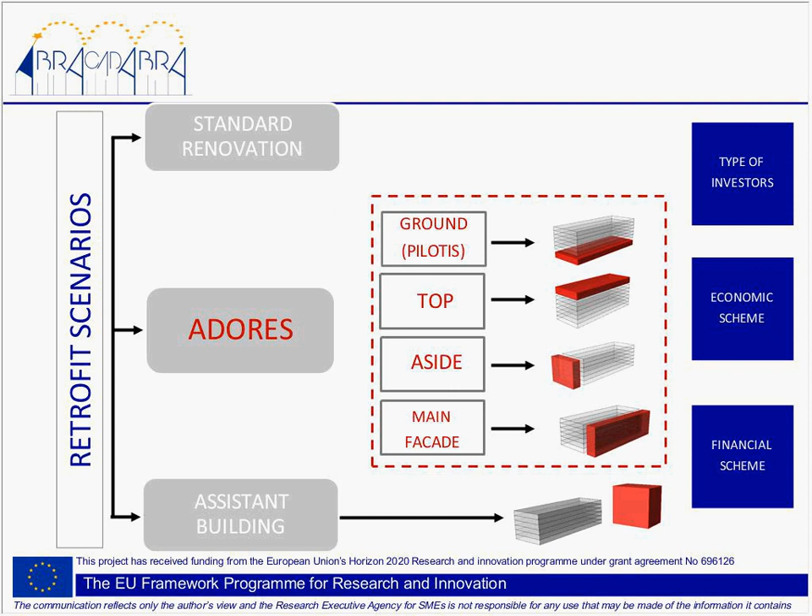The type of target groups and stakeholders that we involve in our project, as Professor Ferrari mentioned, the aim of the project is to have great participation from all the stakeholders, to create, let's say from a market and legislative perspective, a push forward for what is technically already possible.

We want to get condominiums and private properties involved, and for this we are organizing national meetings and international workshops, which can follow the results through minutes and all the reporting on our website.

Technical and construction companies as the technical parties in charge of the realization of the buildings, and also public and territorial bodies that define the current regulatory environment, both from energy plans and urban plans. So we are trying to set up tables to discuss the possibility of including the Abracadabra strategy directly in the available instruments.

Because we've seen that financial subsidies so far, for the past five years, have supported the initiatives only partly. The result is this 1.4% renovation rate per year, and it's not enough to create the revolution and transformation of the existing building stock to the extent that Europe needs.

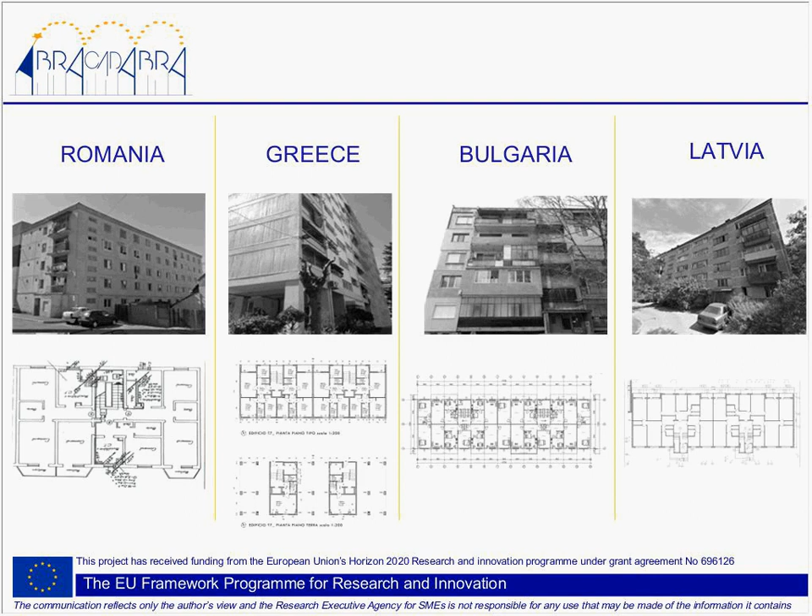I'd like to show you a case study. These are the case studies we now have on board: Romania, Greece, Bulgaria, Latvia, Spain, Norway, Netherlands, and again Italy, several case studies. We will have to enlarge the case study group by another 40 new case studies.

So if your institution, or someone you know, is aware of construction building works that might be interested in testing out the feasibility of the Abracadabra strategy, please contact us. We would be happy to see if your building is feasible to become one of our case studies.

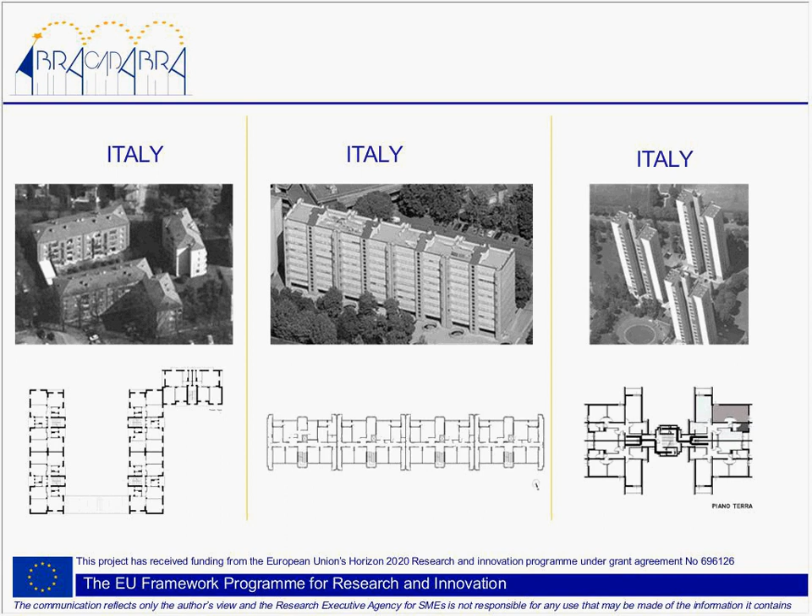That is for now, and you can see we will test the feasibility on a total of almost 2,000 dwelling units for about 200,000 square meters, and the aim is to generate a reduction of over 21 million kilowatt-hours per year. So there is a benefit not only in real estate terms and empowering the possible renovation of existing building stock, but also of course in reducing the energy consumption of the existing building stock.

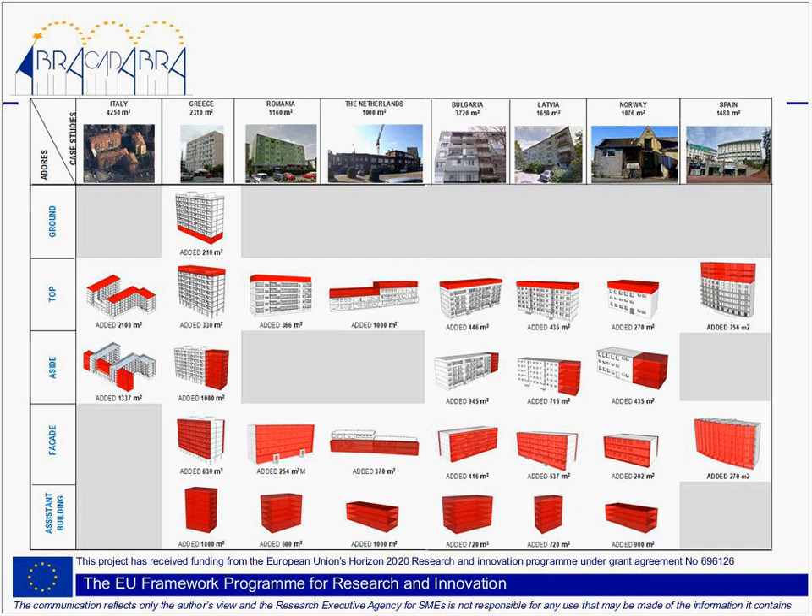Here we can see the different scenarios I mentioned at the beginning: ground, top, side, facade, and assistant building, and which ones are feasible for each of the Abracadabra case studies. Of course, gray boxes are the ones where it's not possible. We do not infer that all the scenarios are possible in all our case studies, but we wanted to analyze in which cases, conditions, and circumstances one or another scenario would be feasible, and which ones are most favorable or viable for stakeholders.

In detail, this is the Italian case study of Corticella. It's a big neighborhood that works a bit like a microcosmos, so it's all connected. It also has a district heating system. So I classified the buildings according to type, G1.1, G1.2, 1.3, and so on.

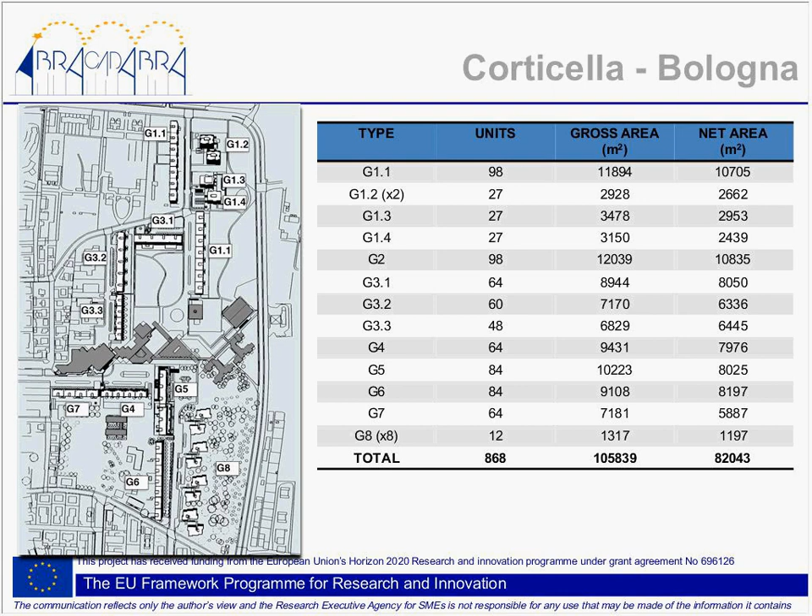Each building typology has a code. We then, for each of these, calculated the possible cost of a standard deep renovation for each scenario, and the cost of eventually carrying out the AdoRes strategy on top, aside, facade, or assistant building. Here now it's the type G2 building typology, a line building, a block, and we have the cost per euro per square meter for each scenario and for standard deep renovation. Consider

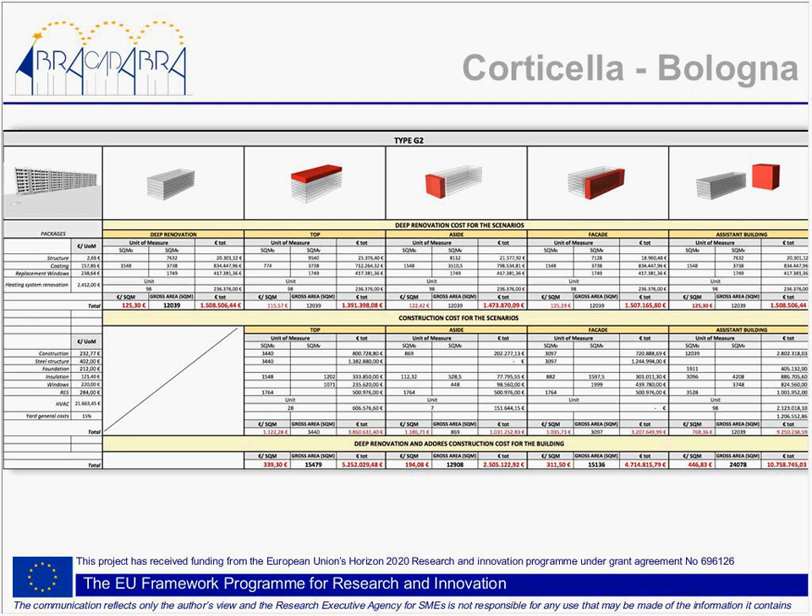the possible architectural outcome. So I wanted to investigate how much add-ons could be built, of course resell, the different amount of square meters and livable surface that could be created, sold, and bring back revenue that could partly or sometimes totally repay the cost of investment needed for renovating the existing building. So the first building is the G2, I mentioned the line. The second is a tower, totally different typology, different possibilities, different amount of square meters, and sometimes one scenario is favorable for one typology and not favorable for another. The third is still a line, but slightly different.

And these are other building typologies, as you can see. They also differ in construction type and, of course, dwelling sizes and typology. So sometimes the facade creates extra space, the enlargement of one room, or can close the existing balcony, or allow the transformation from a balcony to a serra, and so on. What I want to point out is that there is an increase in square meters in the real estate surface, but sometimes some scenarios generate an increase in the quality of the building.

So we're not only talking about energy benefits or real estate and money benefits, resulting in a reduction of the payback, but there are also quality benefits that sometimes cannot be accounted and calculated in terms of money, but do something for the overall renovation of the existing building.

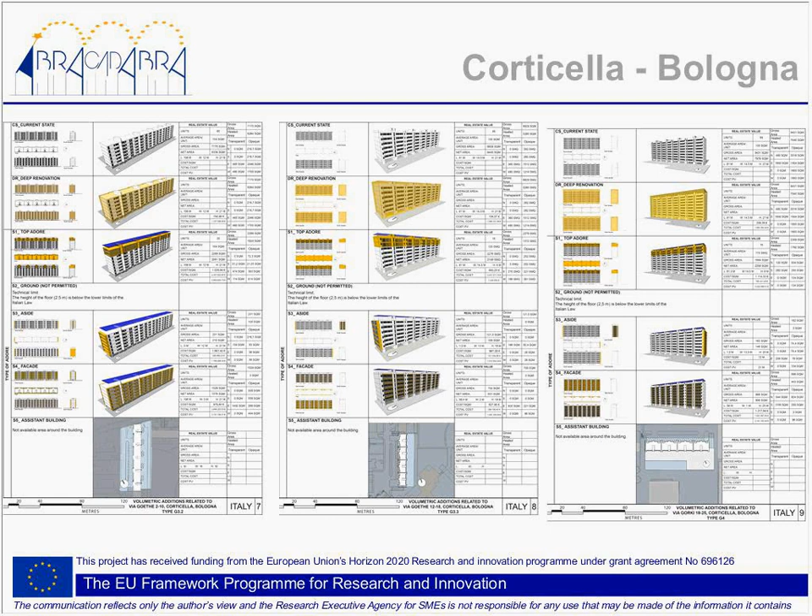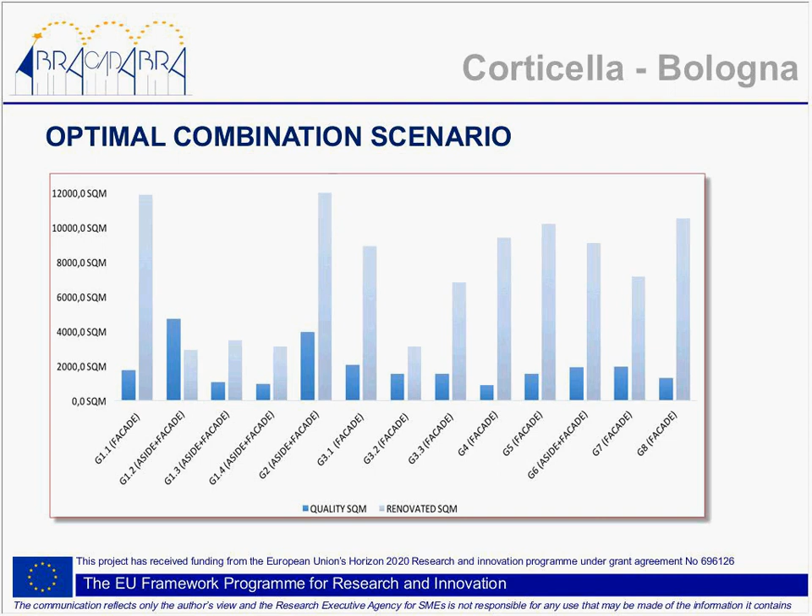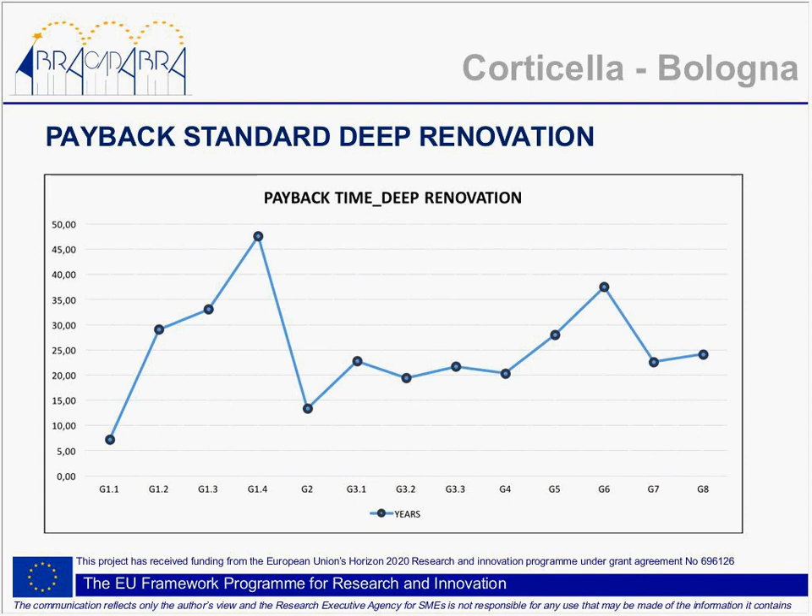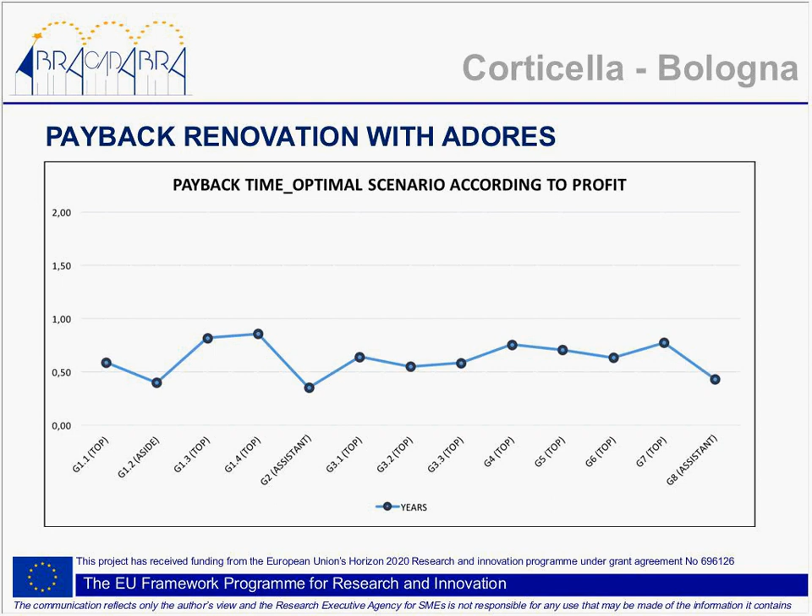When we combine the standard deep renovation with the AdoRes, we have a totally different result, because the framework shows less than 1 year payback time. So the G1.4, for example, with a simple on-top renovation has a payback time of less than 1 year, because creating this additional surface generates revenue that pays back the renovation that otherwise would never be paid back by only the energetic reduction, and even a lower payback created by the possibility of combining the scenarios that we showed.

So G1.4, for example, has top, aside, and facade options. One would like to ask then, why would I spend more, have a higher payback time, for example 1.5 years, when by just doing an on-top I have 1 year? Exactly what we were talking about: there's not only the money and the economic aspect, there's also the quality.

By increasing the facade, for example, and offering the existing inhabitants the ability to improve their houses, we create consensus and gain the approval of the existing building, which, as many who work in this know, is the main barrier to getting the green light from the existing building and proceeding with the works.

This strategy has benefits, as we saw, from an energy point of view and also from an economic point of view. But when combined with work by architects and the existing building, and involving the actual inhabitants, it can also help push the procedure and bureaucracy forward to make it real and happening.

Just to give a whole scale sense, we can see that the total cost to renovate the entire compound is over 84 million. The energy savings overall is 123 million, and the payback time is less than 1 year.

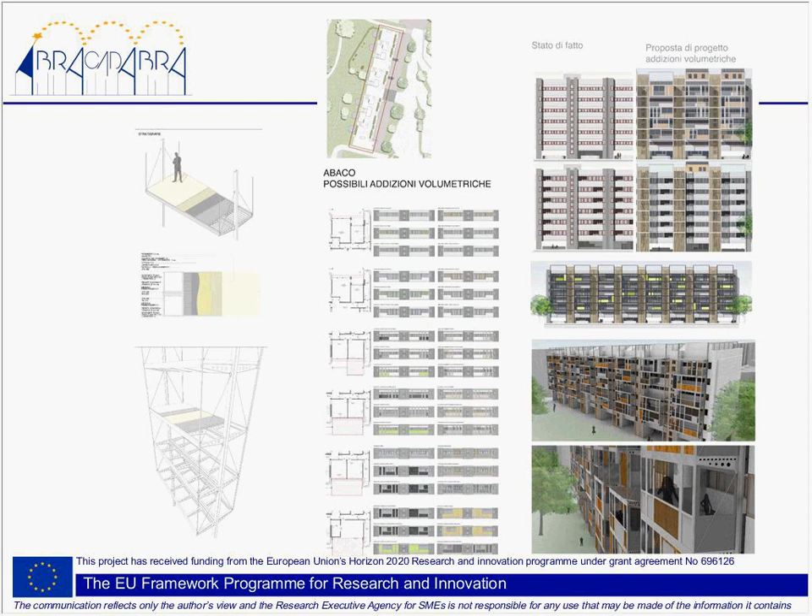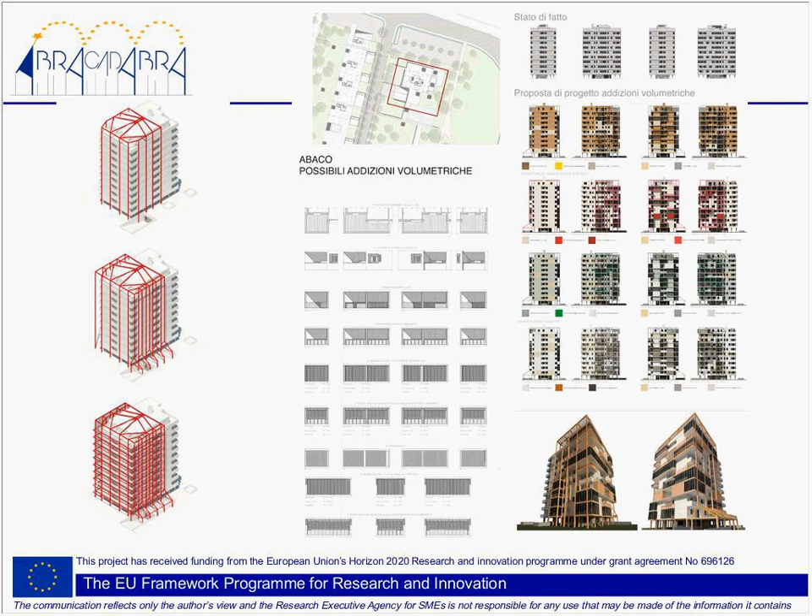This opens up many material possibilities and solutions, as well as colors and transformation of the existing building, giving a new look also to the peripheries. So, going beyond only the energy and economic point of view, but also giving a new architectural feel.

Now some open questions so that eventually we can have a discussion, or you can contact us and give us your feedback, because we're now trying to investigate the questions from public bodies - how can we make it real from a legislative point of view, from a personal point of view, what are the technical aspects connected to it, and the financial institutions involved.

I'd like to remind you that Abracadabra will release policy recommendations for all these aspects, and is working on continuous revision of these policy recommendations to give, by the end of the project, a full review of the potential of this strategy.

At the legislative level, we're finding the social measures and environmental measures that could counterbalance this increase we are proposing, because bottom line, we are proposing an increase and densification of the urban load on the neighborhood. So what can happen at the legislative level, and what can the public administration offer in exchange for this increased additional volume on the existing residential compounds?

From an energy point of view, we are looking at the possibility of integrating the add-ons with energy saving and RES, so the financial schemes, and also what are the social factors - the possibility of customization of these additions, together with seismic and static potential improvement of the structure of the existing building.

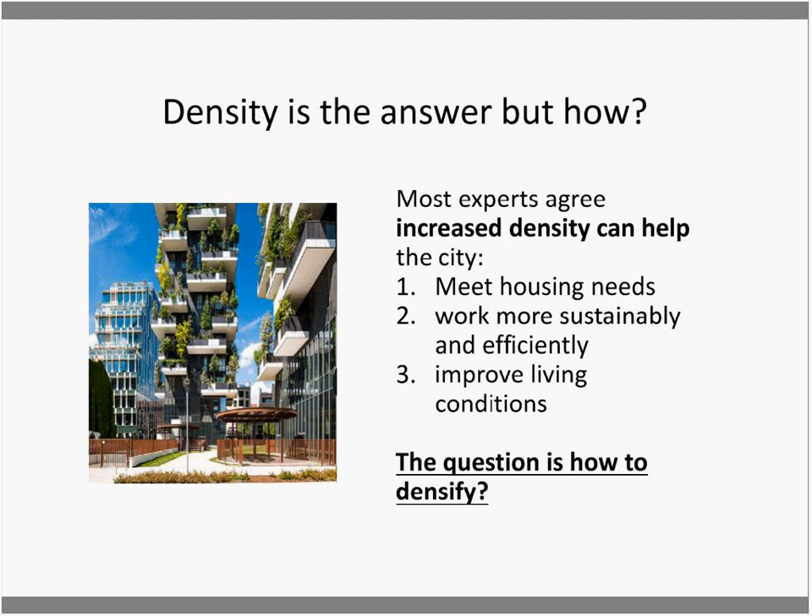Of course, the question is how to densify. It's also very important to consider regeneration. Many of our houses have been built in the post-war period, so most of the housing in Europe is actually aging, and we need an extensive regeneration process. But this proposal, like this one, Abracadabra, can actually show how this regeneration process does not always mean demolition, although sometimes it may mean demolition. If we do it properly, we can look at systems to uplift density, adapt tenure models, and upgrade the public realm.

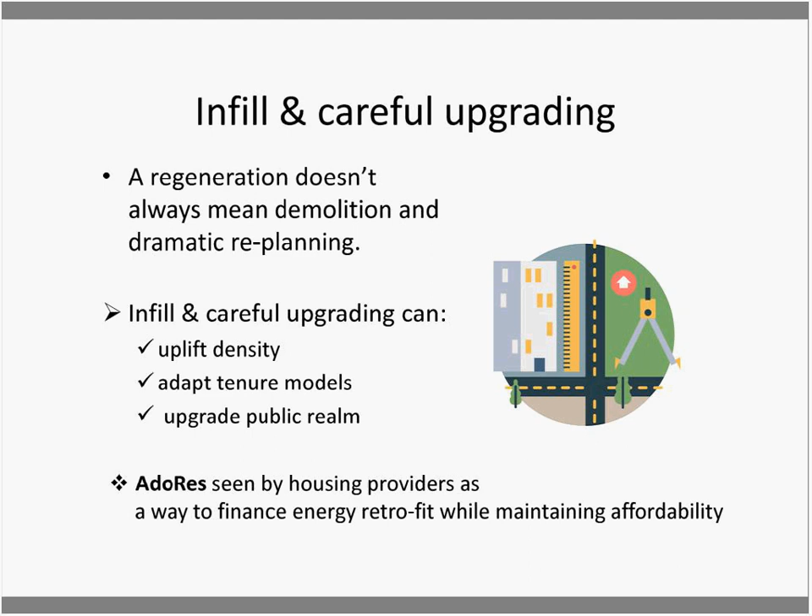So that's why these ideas coming from Abracadabra, ABRA project, and AdoRes are seen as a potential way to answer these questions—a way to finance energy retrofit while maintaining affordability for residents and for owners. So what I'll try to do is just give you a little bit of a taste of the feedback we are getting from the ground. I'm going to go through three examples with three different perspectives.

From Sweden, we have feedback from our member, the Association of Public Housing Providers, who look at AdoRes and volumetric add-ons in the context of a more holistic approach to improving entire neighborhoods. Then we'll look at the city of Paris. We see now in Europe that many cities are taking the lead in a progressive approach to affordable housing, because they have to, due to a severe lack of affordable housing. There we'll see where volumetric add-ons fit in the city strategy to provide more affordable housing. Then in Austria, we have a case study of an individual building where a deep renovation has taken place.

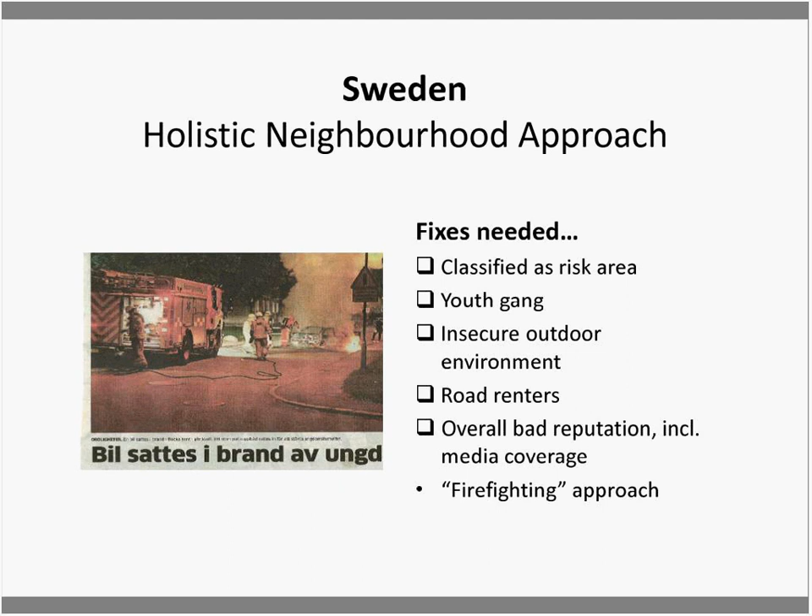Along with actors in the neighborhood, the housing company decided on a holistic approach to improve the neighborhood. This outlines a few of the measures taken: retrofitting works, renovation of public spaces, improvement of lighting. This is very important for increasing the sense of safety, reducing the sense of danger, collaboration with the police, and looking at what they call jobs - a way to engage the youth in the neighborhood in a positive way.

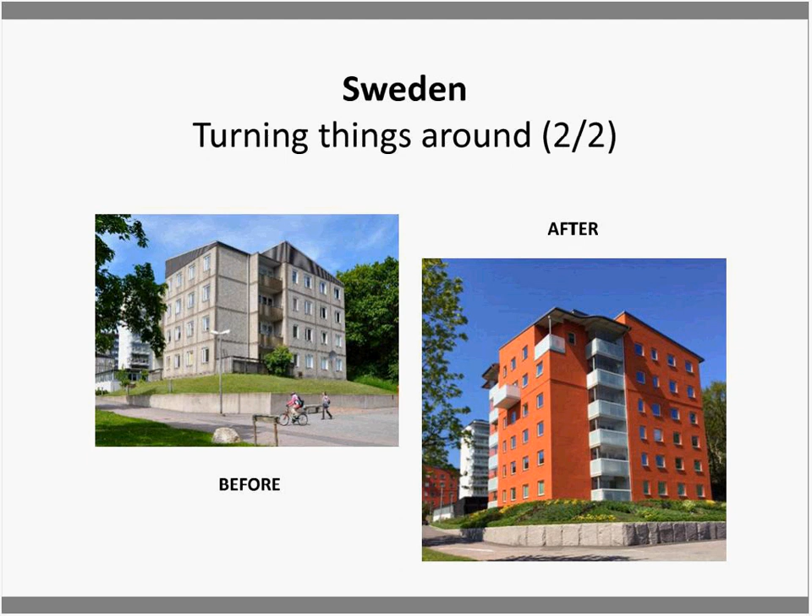A little bit further south from here we go to Paris, and we heard from Paris Habitat, one of the largest social housing providers within the city of Paris. Paris is facing a real lack of affordable housing within its perimeters. What we've been told is very interesting for the ABRA community, because when we have this political will, we really see this type of approach start to flourish.

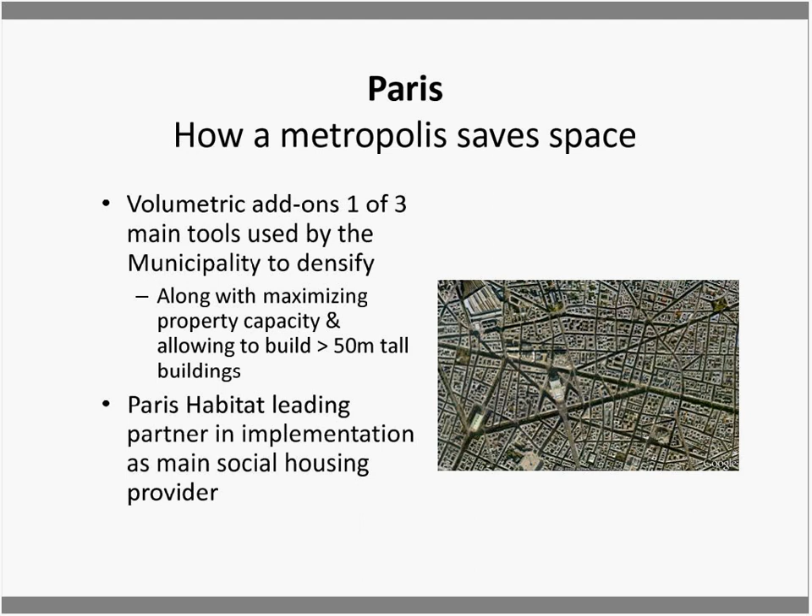One of the tools has actually been included as a tool used by the municipality to densify, along with rules on the amount of taller buildings which can be built and the maximum use of existing property. They're leading on that, and while there are some successful examples, they also stress, as in Sweden, the importance of working with residents.

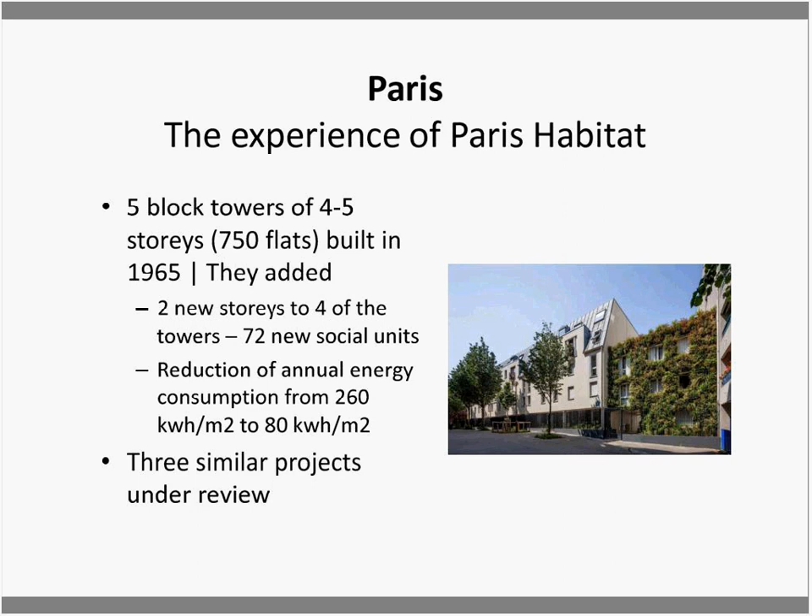Some of the examples have already been completed - 5 tower blocks of 4 to 5 stories, so 750 flats, built also in the 60s. They've added 2 stories to 4 of the towers, resulting in an additional 72 new social housing units. Significantly, in the spirit of reducing the carbon footprint, they've gone from 260 kilowatt hours per square meter down to 80.

They've informed us of 3 similar projects. As I said, what they estimate is that the success of the project really depends on the support of the people living in the building and around it. This deep, permanent dialogue is considered one of the key success factors, which Anna mentioned a bit earlier on.

This has to be paid to the more holistic nature of the work, so better quality of life for tenants, but also in the surrounding neighbourhood, and clear and full support from local authorities. That's an interesting sign we are getting. Because of the shortage of land, which is a big obstacle to the provision of affordable housing faced by many cities around Europe, this can definitely be proposed by us as one possible approach, one part of the puzzle.

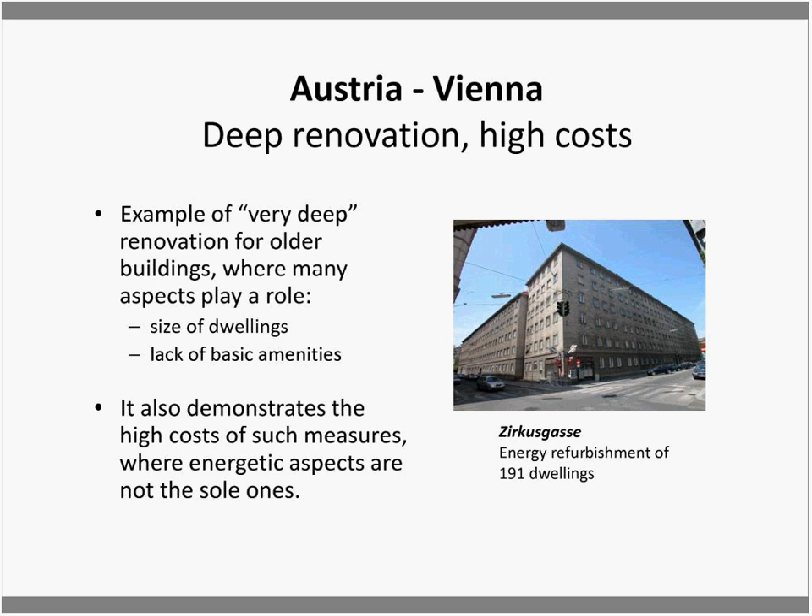We then looked at another example from Austria. Austria has one of the highest amounts of limited profit cooperative housing and public housing. In the city of Vienna itself, there's about 70% limited profit housing and strong political support. This example is of a very deep renovation of an older building, with before and after pictures. There were problems with quality of life within the building, the size of the dwellings, lack of basic amenities, and high maintenance costs. We can see quite a significant improvement in the aesthetics - a good example of a successful project.

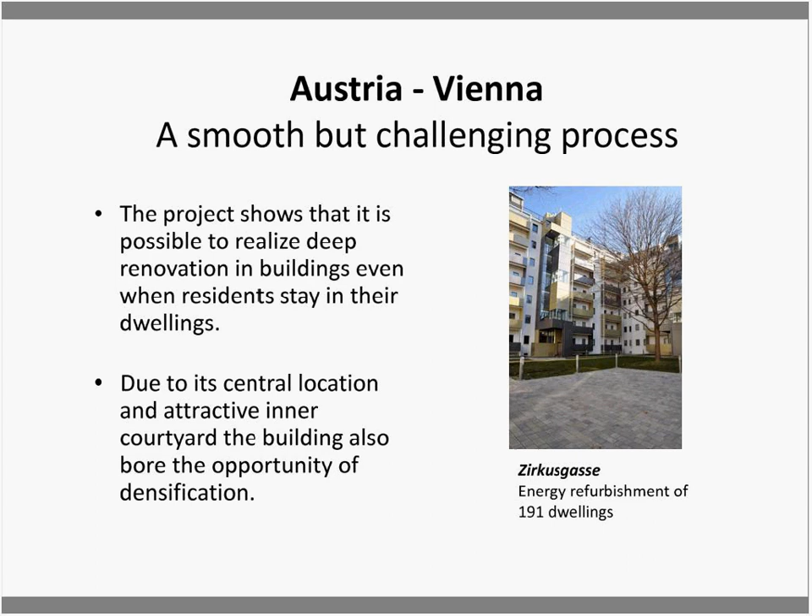It was also stressed by our partner GBV, based in Vienna, that because this was a central location, it lends itself to the ABRA approach. In cases where buildings are in less desirable locations, perhaps empty buildings, the ABRA approach might not work. But this is a desirable location where there's a lack of affordable housing, so it works well. This application worked.

If we can finance the cost of refurbishment through the add-on, it's a little bit more complex. In theory this can be done, but because of the regulatory environment and the cap on rents in this regulated sector, it's not possible in this case. However, the main objective is reached in that you have an addition to the supply of affordable housing, an increase in quality of life, and a reduction in energy consumption.

It's definitely one of the pieces in the puzzle to lead to a fair energy transition, a transition which involves all, where all can live energy efficient lives and higher quality lives in an affordable way, and with collaboration with the community.

This feeds into the key messages going into the discussion at European level - the need for an evidence-based approach. Where this fits in the ABRA strategy is really the need for more evidence and facts on what the housing stock is like, so that we can really measure the potential of the ABRA approach and see to what extent it can be used.

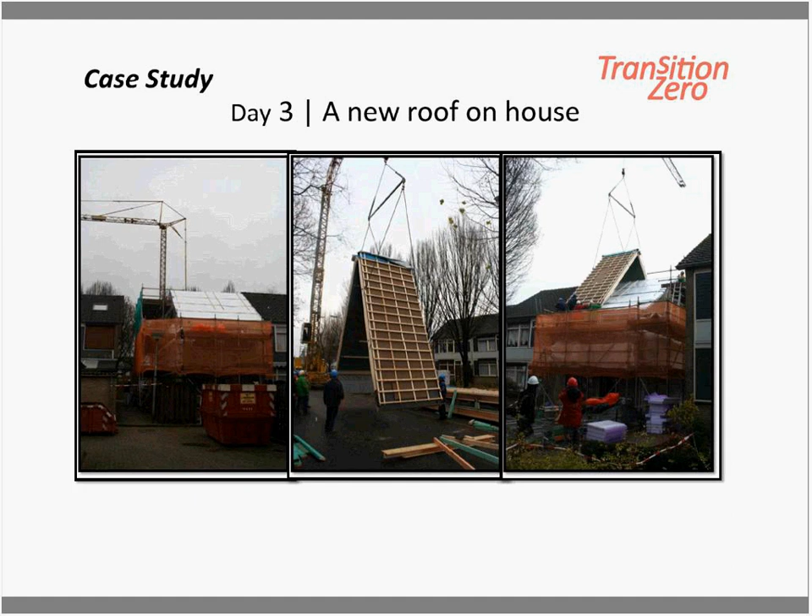One nice example we're tracking at the moment is called Transition Zero, which takes a prefabricated approach - it's built into a new shell for the building, with inbuilt PV and ventilation systems, though it doesn't yet include add-ons. This is the approach we'd like to see generalized - a prefabricated approach where the renovation takes place over a period of 10 days.

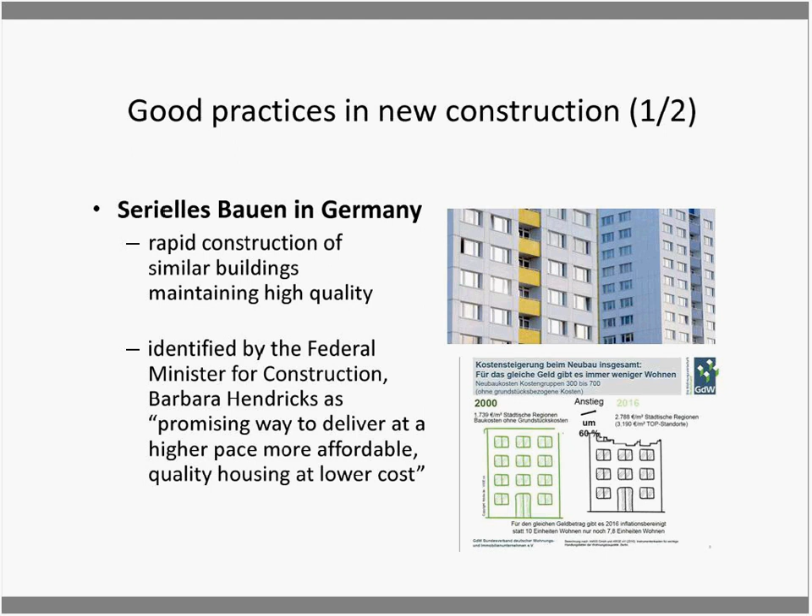These types of industrialized approaches feeding into the research coming through from ABRACADABRA will be key if we really want to upscale refurbishment in the residential sector. We're seeing from Germany this interest in what they're calling serielles bauen - approaches to industrialized modular renovation which can be done quickly, affordably, and at a high quality.

So that gives you an overview of what we saw, and a few examples of where volumetric additions are being applied, and the perspective for the future. Happy to take any questions.

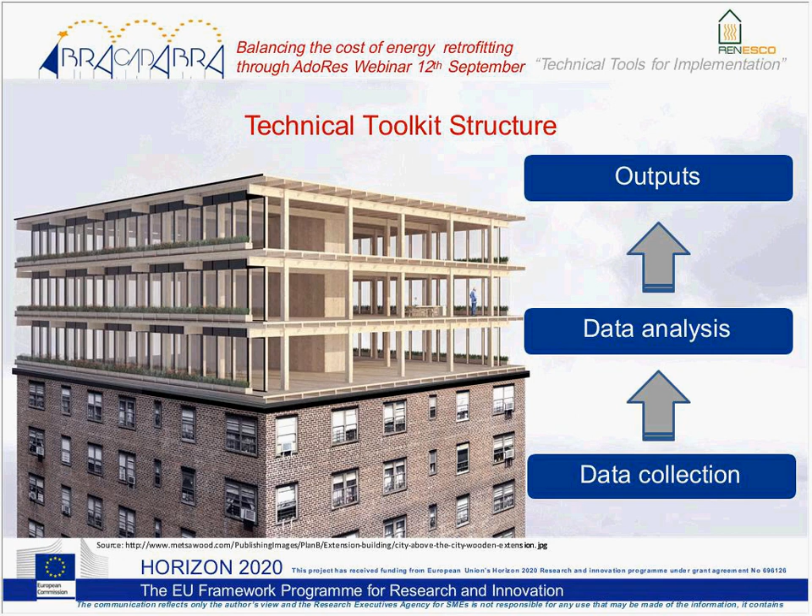Already these are our potential scenarios that we're looking into. Each scenario is unique, and for each case study they may vary - sometimes there's only one possibility, but it should be the right one, to help building owners and residents with their renovation strategy.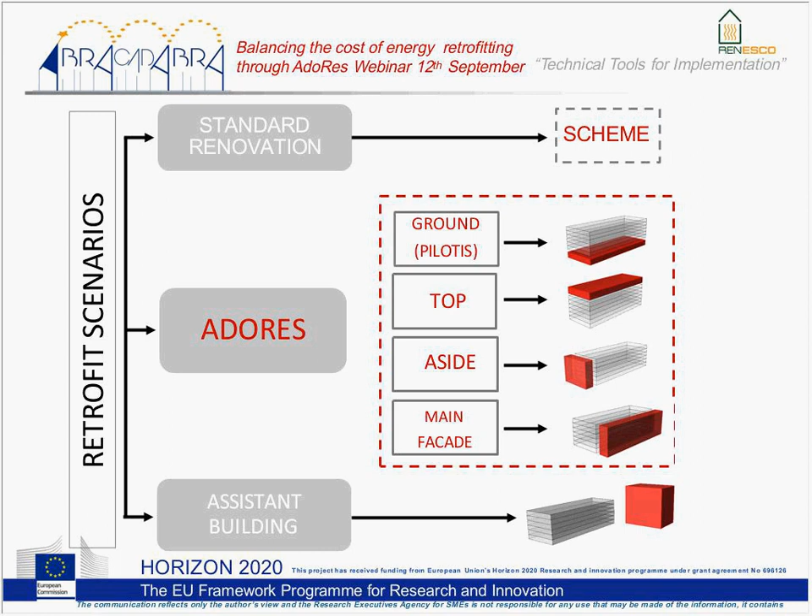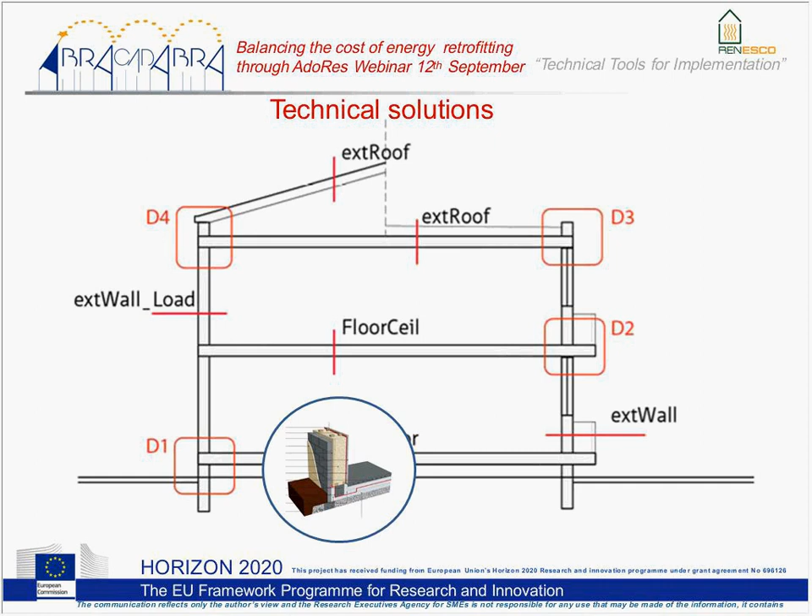The analysis of the building technical toolkit includes as well the technical solutions, like a catalog where we describe and propose some potential different solutions - connections for the building, basement insulation, external wall types, roofing types as well - describing the materials, their properties, and what materials may be used to reach or provide the suggested result.

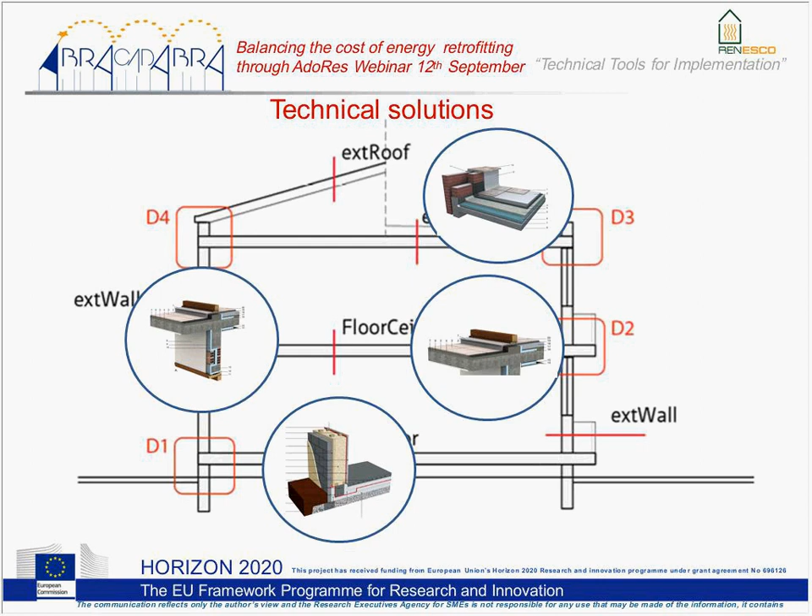As Elena already mentioned, we are now looking into three technologies: timber panel construction, brick construction, and prefabricated concrete panels. The choice of technology may vary between countries. For example, in Latvia, since we have quite some amount of wood resources, we may choose timber panel construction for our studies.

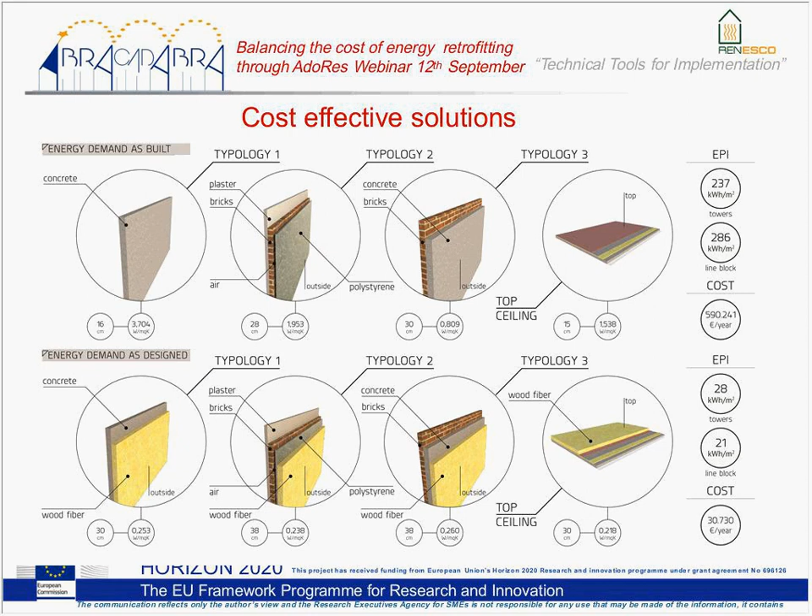When developers or other involved parties do renovation projects, we always have to choose cost-effective solutions. This means we can't, for example, install 50 centimeters of mineral wool insulation layer without estimations and understanding - the most effective might only be half that thickness, and beyond that you lose money, as the extra thickness won't gain as much heat savings or reduce energy losses as you might assume. So it's important to take cost-effective solutions into account for the end measures.

With the energy technical tool, which is being developed during the project as an open online platform, the user can use the previously mentioned data to get the primary energy needs before and after renovation, heating and cooling needs for each case study, the electricity needs and the potential savings after renovation, as well as reaching nearly zero energy building.

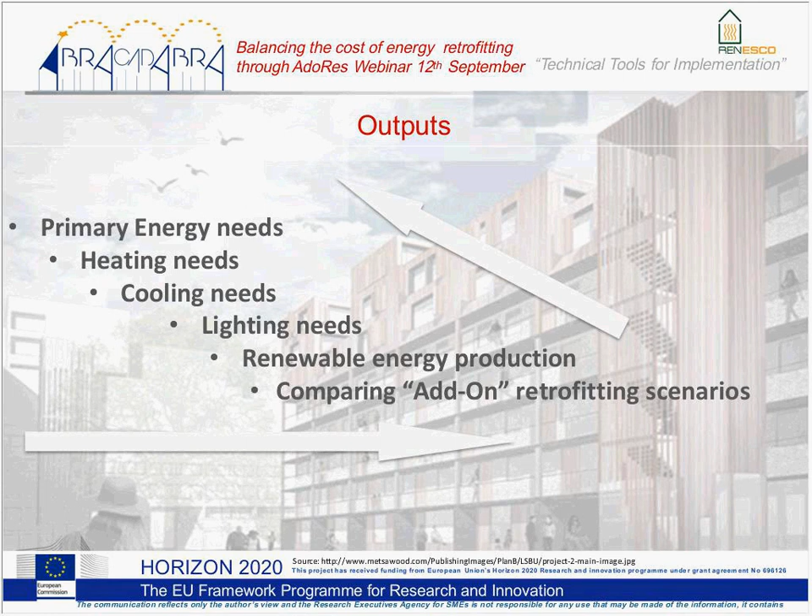We also consider renewable usage and automation of the building. The toolkit includes estimations of potential gains from renewables, if you install, for example, solar collectors to provide domestic hot water or even for heating, as well as heat pumps to cover cooling needs to cool down the building.

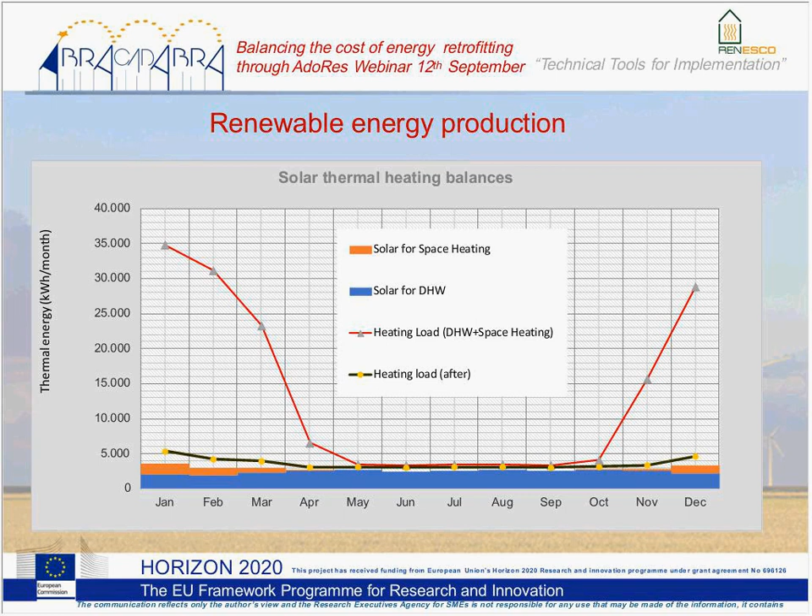And we also take care of the PV panels, which are assumed and estimated in the building energy performance calculation. Those are the technical aspects of the building which we are covering and analyzing.

I would like to mention one quote which I like, because it points out that, as previous speakers mentioned, beyond the earnings, invested money and payback time, there is also the gain of a comfortable environment for residents, and aesthetic improvements in the building, which add value as well for these renovated buildings.

Yes, I'm happy to answer your questions as well.

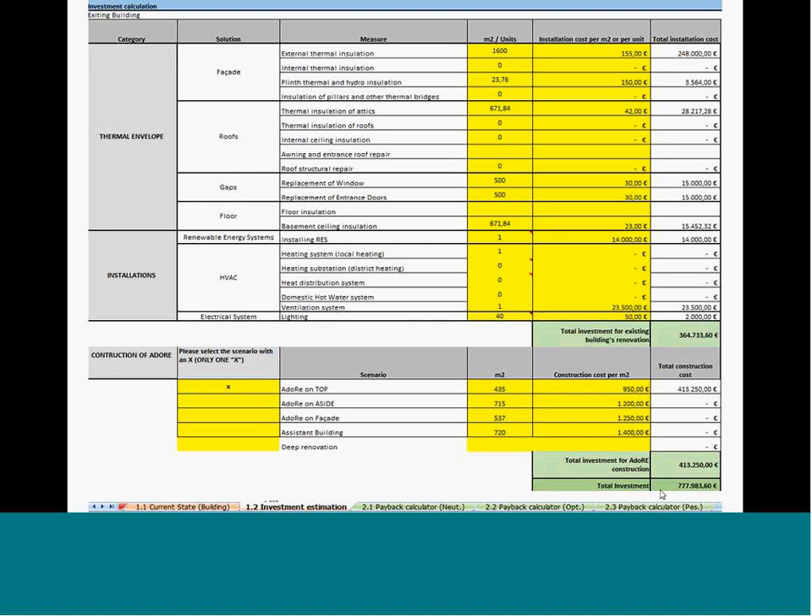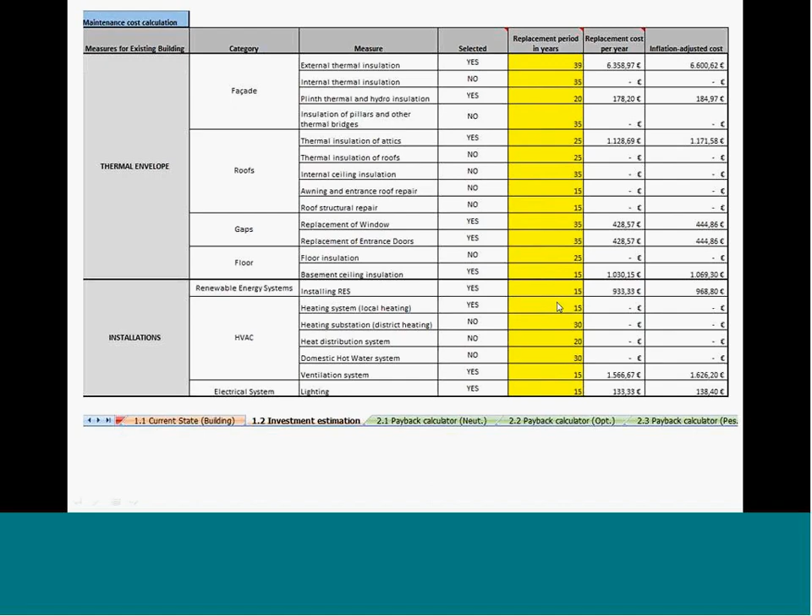Determine also the payback period and the new value of the building. The user must put for these cases energy savings in a percentage, and this is evidence of the impact of the renovation on the energy consumption. The expected energy savings will be obtained from the technical toolkit on the case study.

They should put the expected maintenance costs as a percentage of the renovation again. The energy costs can be found in the database of the toolkit. This per year, excluding taxes and other expenses. Again, if there are no real data, the toolkit can work with statistics for the energy consumption in every region or country.

Financial information of the loan: that means when the loan will start, the duration of the loan, and the interest rate of the loan. And the original value of the building, already, in the current state, and the average value per square meter of the new construction. Let's see how the toolkit works in this procedure.

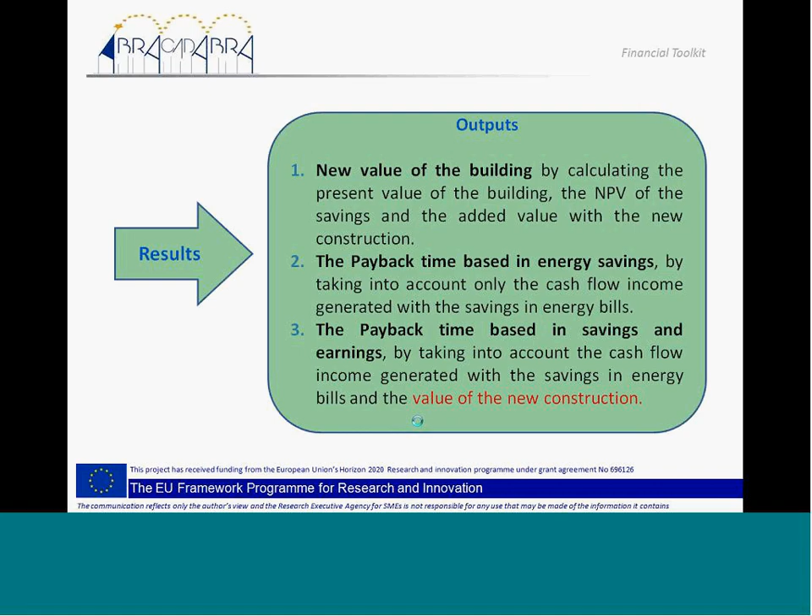Of the financial costs for the loan, which are 131,000, and construction - because in this scenario we have chosen to have an add-on on the top floor, since we have a new construction already, we need to account that new add-on also as the real estate worth of it. So the added value of the new construction: we know the square meters of the new construction would be 435, we know the average value of the land, so we have a new added value of our construction of 178,000 euros.

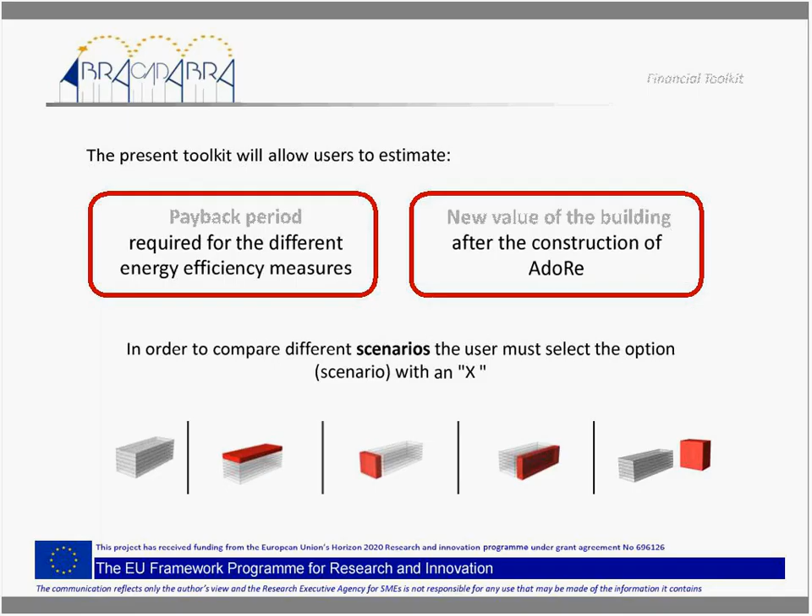I see a hand raised. Michela, I'll unmute you at the moment. There you go, can you hear me? Yeah, I can. Thank you for your presentation.

It's very inspiring. I was wondering, when you're referring to the second part of the toolkit that makes the return of investment shorter, if you also take into consideration the earnings, would you suggest that the volumetric addition should be sold or should be rented? What would you suggest, taking into consideration the scenario you have drafted for us, would be the valuable suggestion?

Can you... So in this area, they have calculated that they sell this property within 2 years, but it would depend on the case study. If we're talking about a hotel, then they have an increase of rooms, so it gains even more income per year. So it really depends - they could either rent it, sell it, or use it as hotel rooms. This is really based on each case study and country, and what the initial purpose of the building would be. For instance, if it's done on a building in a very expensive area of a city, of course it would be very easy to sell and very fast, and the payback will be as fast as you can sell the add-on of your construction.